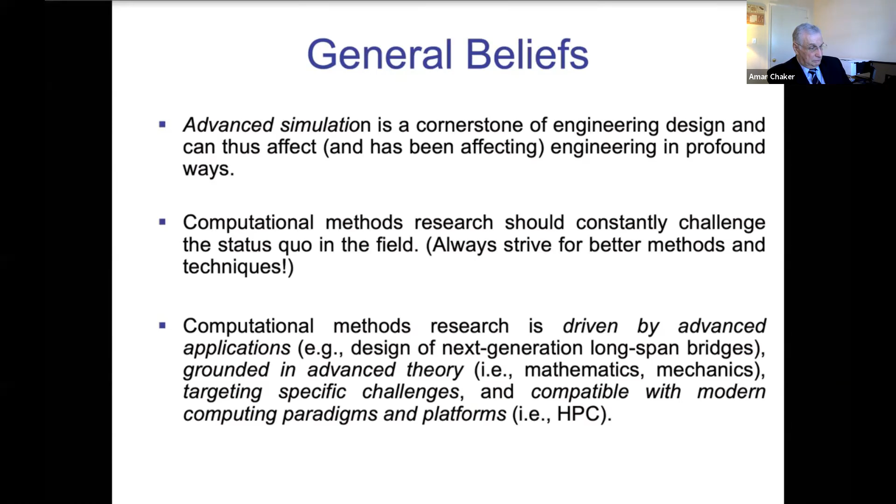Now, maybe a couple of words about operational resilience. It's not exactly my field, but I'm hoping to bring some of my perspectives on computational methods into the OR world. These are some of the operational resilience relevant beliefs, I feel. Starting from the definition, when we talk about infrastructure or enterprise, it's referred to as resilient if it's able to effectively anticipate, absorb, adapt to, and or rapidly recover from potentially disruptive events.

So how do we achieve that resilience? This may be achieved through, first of all, careful initial design when you anticipate such things. Once you've designed and built your structure, it's important to continuously monitor it and assess for things like damage, and hopefully carry out some damage prognosis, which has a predictive flavor to it. Accurate prediction of future behaviors is very important if you want to continue making your structure resilient. And of course, targeted retrofitting to mitigate unforeseen events.

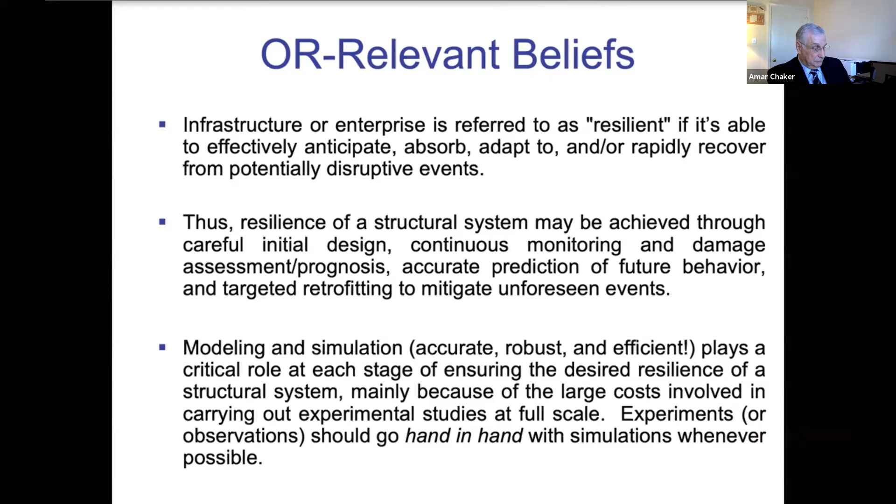And so, as a result, modeling and simulation—and here we're talking about accurate, robust, and efficient methods—plays a critical role in each of the stages outlined before, ensuring the desired resilience of a structural system. This is mainly because of the large costs involved in carrying out experiments at full scale. However, it is my view, and it's been my experience over the years, that experiments or observations should truly go hand in hand with simulations wherever possible.

So I mentioned applications and research driven by applications. Here are some of the interesting things that we're looking at: wind energy, more recently in ocean and marine environments. We also started developing air blast methods for demolition or retrofit.

Biomechanics, especially the realm of biomedical devices, remains really important. We also had some work in manned or unmanned aircraft, and hopefully going into undersea vehicles soon. A lot of these phenomena require a careful job using methods for fluid mechanics and structural mechanics.

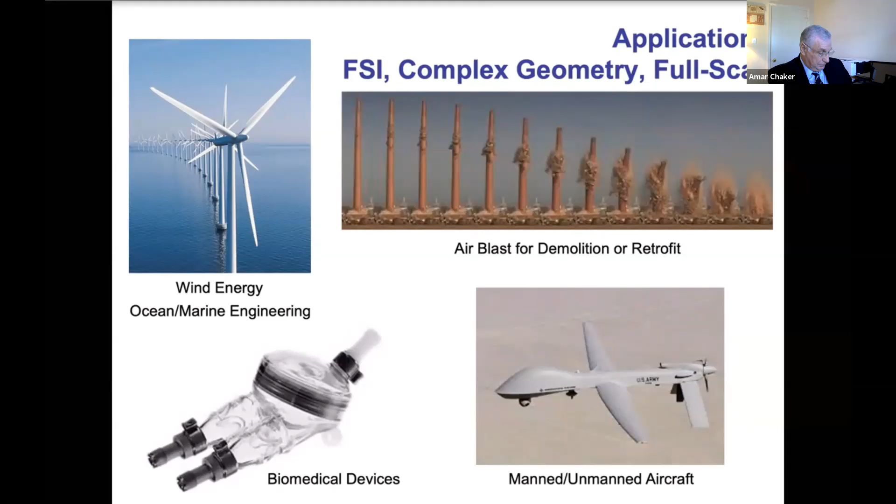Solid mechanics and their coupling. So let me proceed to the how of the presentation, and this is the so-called secret sauce. So how do we do it? Well, there are a couple of things that need to come together.

And the first one is isogeometric analysis. The effort started a few years ago. The first paper appeared in 2005.

So the biggest driver was Tom Hughes, University of Texas at Austin, and I was his first PhD student that defended on this topic. And the motivation for IGA came from the following chart that was provided by Sandia National Labs.

If one thinks about an analysis pipeline: you start by designing a solid model, you create it, you need to carry out geometry decomposition, then you carry out the meshing, you manipulate the mesh to make sure that things are analysis suitable.

You assign model parameters, assemble the model, and then you run the simulations. You post-process results and you archive the artifacts. And what you find is model building and analysis present a significant bottleneck.

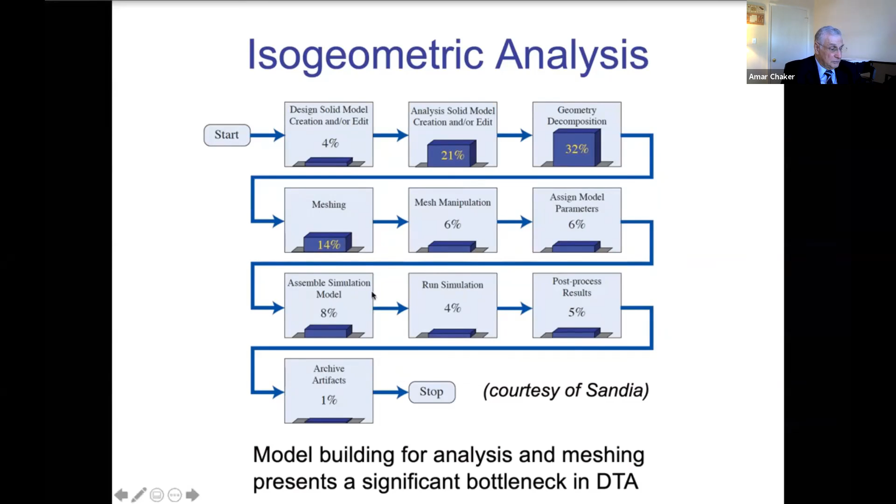It amounts to 70-75% of your effort. And so we looked at the possible solutions, how to circumvent this. And this is how isogeometric analysis was born.

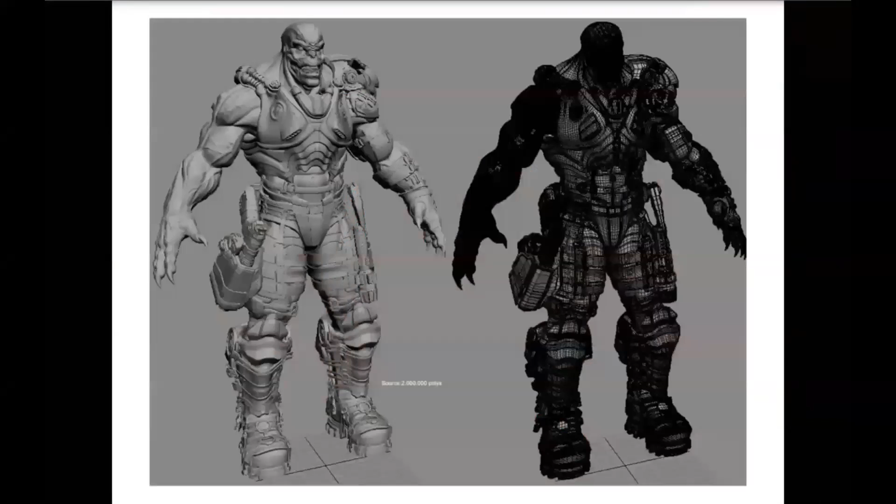B-spline type technology. This is a cartoon character, and on the right you actually see very clearly the underlying surface spline mesh that it takes to model a character like that. This is a snapshot from a CAD software that makes use of what's called NURBS,

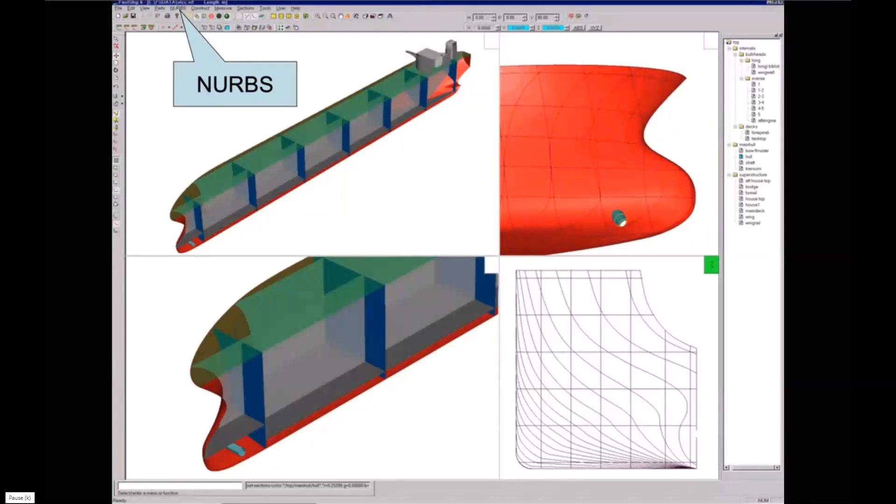where over the years we built an analysis framework which is very similar to a finite element method in many ways. We make use of variational or weak formulations, and just the underlying unknowns, like displacements, temperatures, happen to be discretized by splines.

And so the technologies that we use come from computer-aided design, computer graphics, and visualization. And the idea is that you have the same, in quotes, exact from the standpoint of CAD functional description that's used for the geometry definition as well as the simulation.

And IGA certainly includes standard finite elements as a special case, but offers some other possibilities, such as precise and efficient geometric modeling, simplified mesh refinement once you've built that initial geometric model, superior approximation properties. These spline functions, even the rational counterparts of splines, are very good for numerical analysis. You're able to approximate things very well.

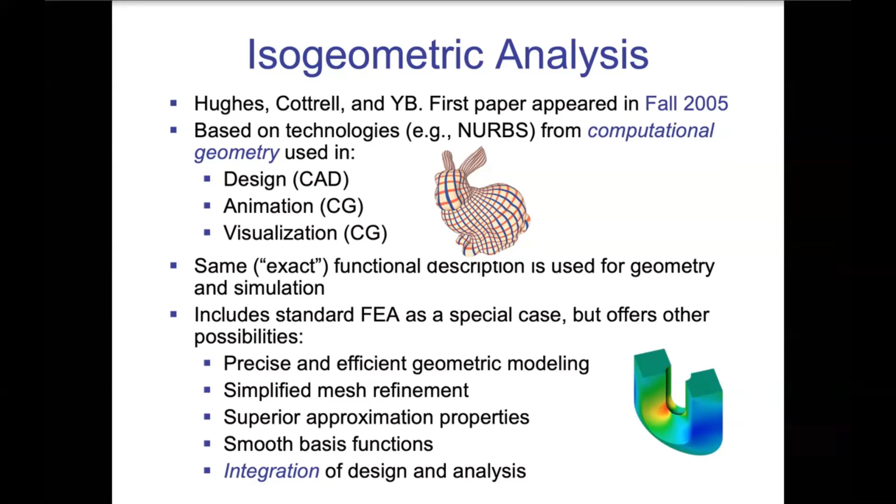All right, so now the mechanics part. This is an engineering mechanics event, and there's no way that I can deliver a lecture in engineering mechanics without talking about weak or variational formulations.

So let me take you through our thinking about fluid structure interaction. And probably the details of some of these formulas are not so important, just the content and the philosophy that is.

We'll look at the problem from the standpoint of an augmented Lagrangian type approach, where you identify, by U1 and P, it's done in the context of incompressible flows, designating the unknowns coming from the fluid mechanics side, velocities, pressures. U2 are the unknowns coming from the solid, typical displacements or velocities.

The way I couple the two subsystems, at least at the level of this augmented Lagrangian, is through a Lagrange multiplier type approach. Lambda is the Lagrange multiplier. The way I define the augmented Lagrangian is I take the contribution from the fluid, I add contributions from the solid or the structure.

At this point they exist independently of each other, and then the way I couple them is through the Lagrange multiplier that enforces the kinematics of the fluid and the structure at the fluid structure interface. Note the subscript T here - that interface can be moving in time.

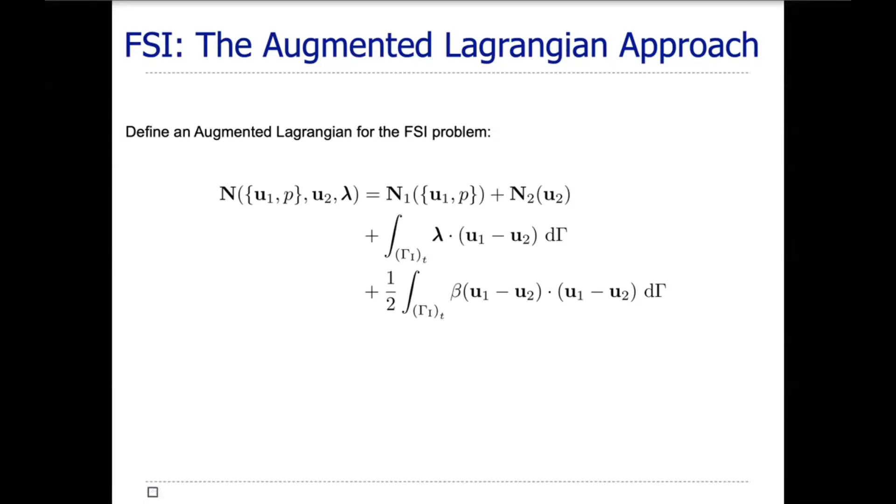Once I have the Lagrangian, I can start turning the crank. I compute the so-called stationary points of that Lagrangian by taking the variation of the expression with respect to fluid mechanics, structural mechanics, and Lagrange multiplier unknowns. That gives me three variational formulations that are coupled with each other.

The top line here is fluid mechanics. You can see that the B's are the semi-linear form, kind of a linear functional, which are the loads. This term here is the effect of the Lagrange multiplier, and this term here is the effect of this additional penalty that I'm bringing in.

The solid mechanics and structural mechanics has the same structure - you have some weak form or variational formulation governing the structure. Here's the effect of the Lagrangian multiplier, and here's the effect of the penalty. And the last equation just says in some weak fashion that the kinematics between the fluid and the structure hold.

This is an important point of departure for a variety of approaches - I haven't said anything about finite elements or discretizations yet. The only constraint at this point is that I will treat both the fluid mechanics and structural mechanics in the weak form, which pushes me in the direction of using finite element methods, isogeometric methods, or mesh-free methods.

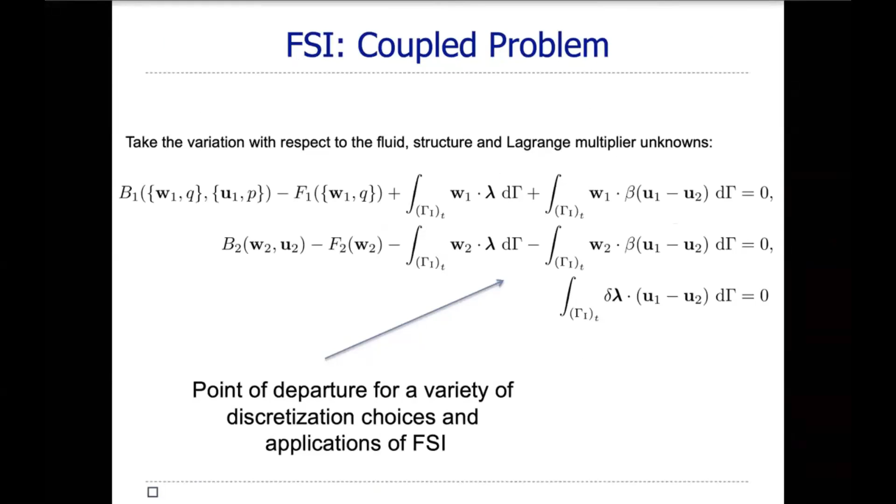Theoretically it's very good, but I really do not want to carry Lagrange multipliers with me. It makes things complicated, and it makes things fairly expensive from the computational point of view.

The approach I take here is that first, as we all know, Lagrange multipliers, when they penalize kinematics, they take the interpretation of force, or in this continuum setting, of the traction.

But now I have two subsystems that I'm coupling, fluid and solid. So the Lagrange multiplier has the interpretation as a fluid traction or a solid traction. And because of the presence of these penalty terms, the Lagrange multiplier also has this kind of contribution from the mismatch between the fluid and the structural kinematics.

But if I subtract the two equations, I get this condition here. So independent of the presence of the Lagrange multiplier terms, the fluid and solid traction in this framework are always in balance. This is what you like to do.

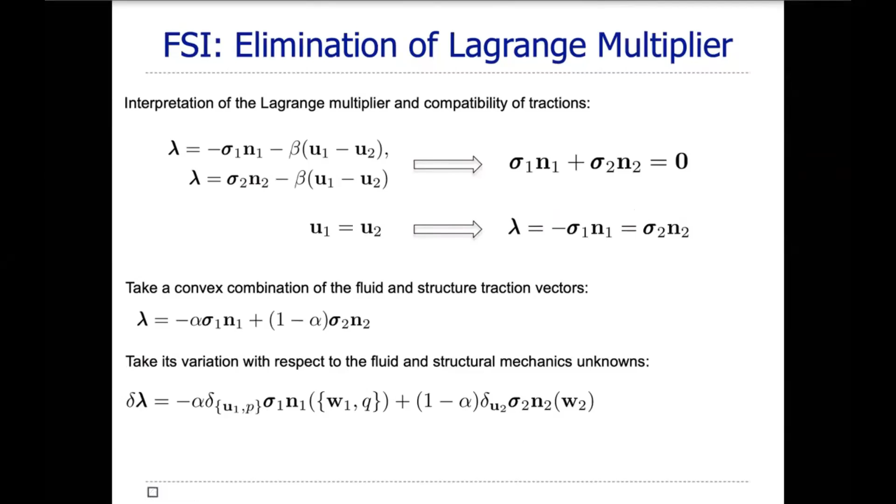Taking this as an expression for the Lagrange multipliers, I can take a convex combination. I can take a variation of the Lagrange multiplier also with respect to the fluid mechanics and structural mechanics degrees of freedom, and I can take this formulation and condense it to something like this.

So I basically analytically remove the Lagrange multipliers from the formulation, and I arrive at a fully coupled fluid-solid system. And here, because the fluid mechanics and solid mechanics fields exist independent of each other, I can discretize them independent of each other.

And then the coupling will take place over the interface that moves in time, using these additional terms that arise from the analytical elimination of the Lagrange multipliers. This leads to an efficient fluid structure interaction framework that could lead to a lot of practical applications.

One thing I'd like to note: these methods were developed for non-matching but conforming interfaces. You can think of two different meshes for the fluid and the structure that don't match at the interface, because the structure could be more complicated and in the fluid case you may want to simplify things. But at least they're somewhat conforming to each other, so as the structure moves through space, you're able to move the fluid mechanics mesh that follows it.

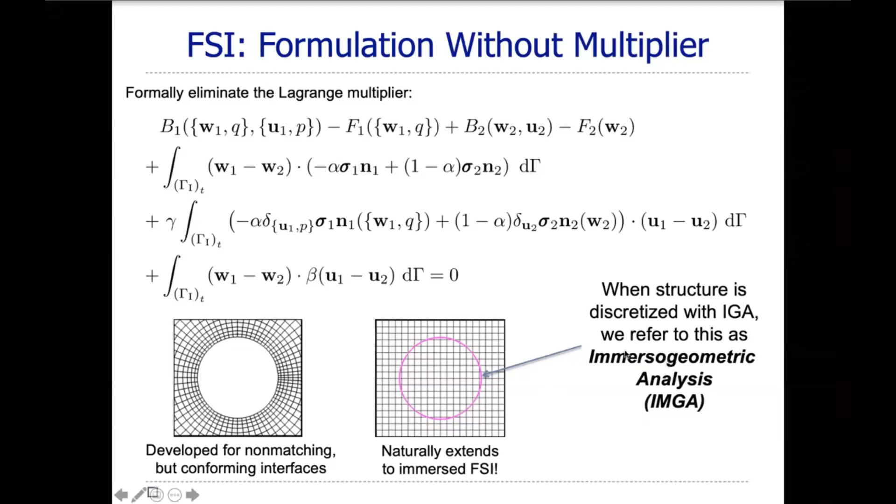But there's been a lot of excitement in the community for the so-called immersed type methods. The formulation can actually be applied directly over immersed boundaries. When the structure is discretized using isogeometric analysis, we refer to this combination as immersogeometric analysis, or IMGA.

So I can set some coefficients, and I find that if I look separately at the fluid mechanics and the structural mechanics problem, I have a weak formulation of fluid mechanics that's driven by the structural kinematics, given here by U2. It amounts to what's called a weak enforcement of kinematic boundary conditions for fluids, which is really important in this setting because I can control the extent to which I satisfy these kinematic conditions.

So if you work on coarser meshes, you can relax the satisfaction of the no-slip component, allowing a relative slip between the fluid and the solid, and thus you don't need to employ very fine boundary layer meshes.

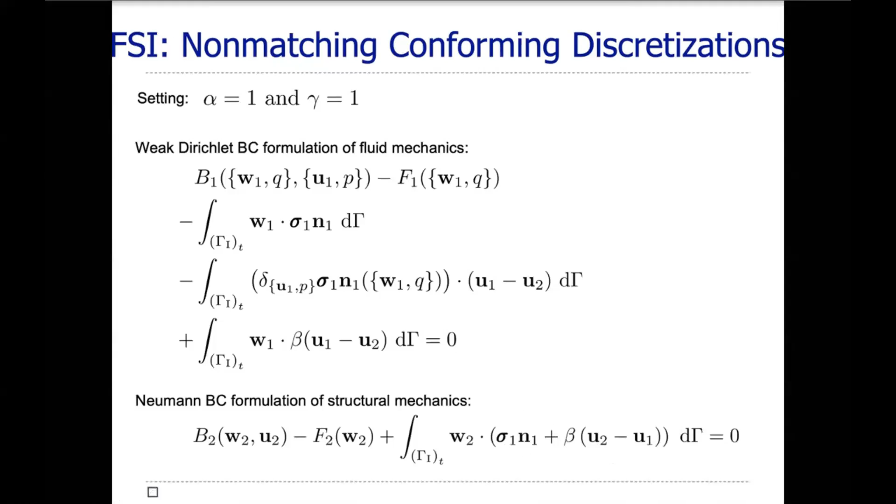When it comes to the structural mechanics or solid mechanics formulation, you see that it's driven by the traction coming from the fluid. It becomes something very classical, but that traction is modified by a penalty term that takes into account the difference between the fluid and structural kinematics.

So, some special cases: if the meshes match, if I match the fluid and structural discretizations on two sides, all of these interface terms drop out, and I recover classical monolithic FSI.

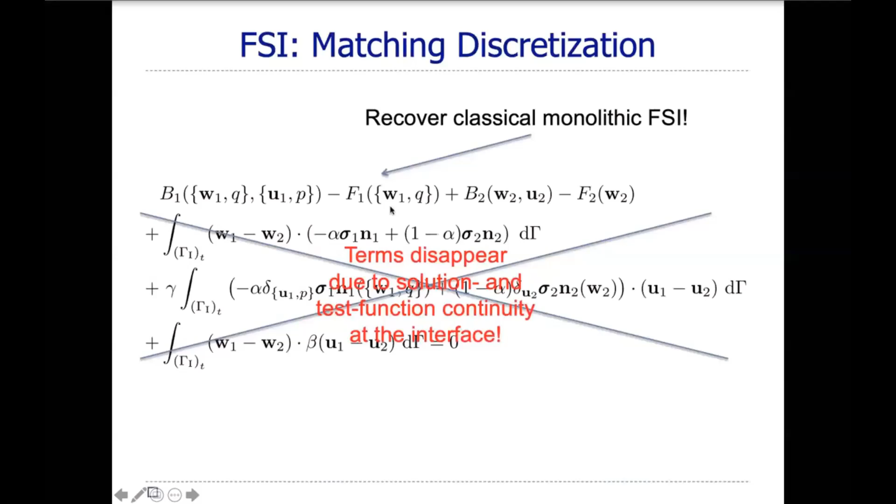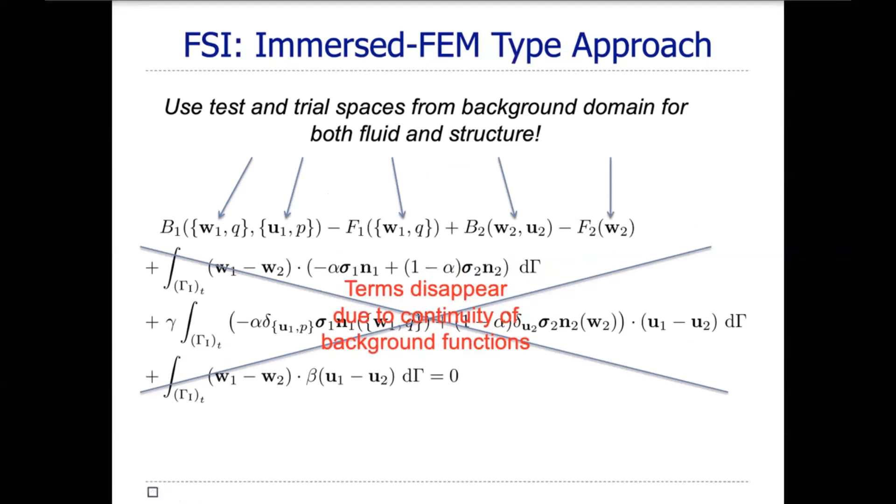Another interesting thing is if I decide to approximate the fluid and structural solutions using the background mesh quantities, again the interface terms drop out, and you get an immersed finite element type approach. We'll show examples of that later in the presentation.

Next, if you decide to get rid of the fluid completely and just leave the solid, and approximate it using the background discretization, you arrive at what's called a material point-like technique. So there are a lot of important special cases.

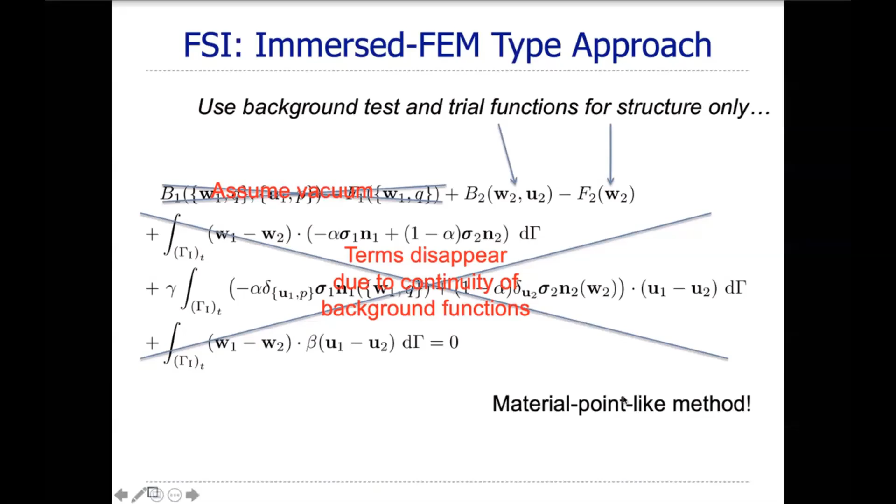Again, this was a fairly cursory overview, but I just wanted everyone to get a flavor of how we think about FSI problems and what we do. Of course, there are a lot more details that go into decisions as to how to stabilize the fluids, the choices of nonlinearities in the solid, how you want to approximate damage, how you want to approximate fracture, and so forth. But this overall framework allows you to plug in and remove different approaches, you kind of use your favorite approaches for things.

So next is the outcome, the what. Hopefully the why and the how is going to lead to a what that's significant. Here I want to cover a couple of cases that we worked on over the years, and let me start with the work on the fluid structure interaction analysis of full-scale wind turbines. Here I'm listing collaborators, a lot of whom are my former students. They're faculty at other universities, as well as Sutanu Sarkar, who's a real expert in stratified flows at UC San Diego.

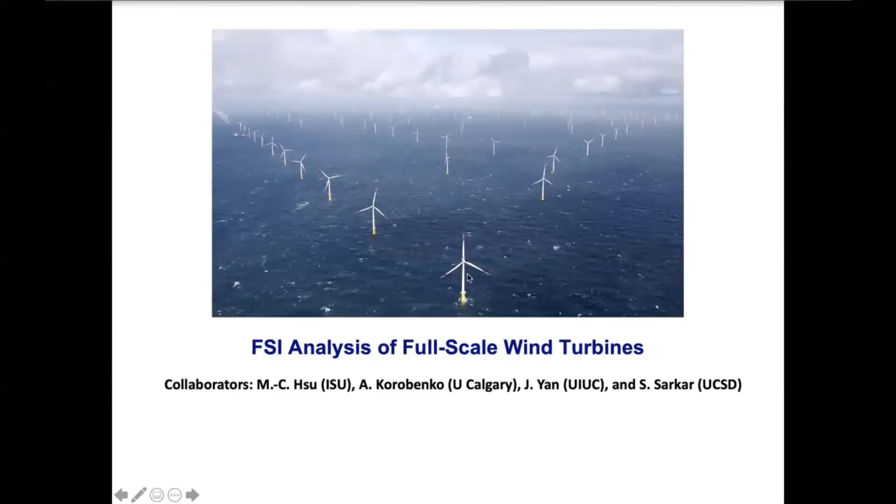And the problem that we're after is to be able to simulate scenarios like this. Just like in this figure, it's been noticed that depending on the direction of the wind and how the turbines are placed, the turbines in the second row or third row start producing less and less electricity than the turbines in the first row. Certainly modeling can help understand that question. So we abstracted our problem as follows: we're placing two turbines back to back, separated by about 1 kilometer.

All the dimensions are in meters, so there's about 1,000 meters, which is in between. We're trying to solve things at full scale. The idea is to carry out a fluid structure interaction calculation of this setup, but we have to do it in a way that's manageable and practical.

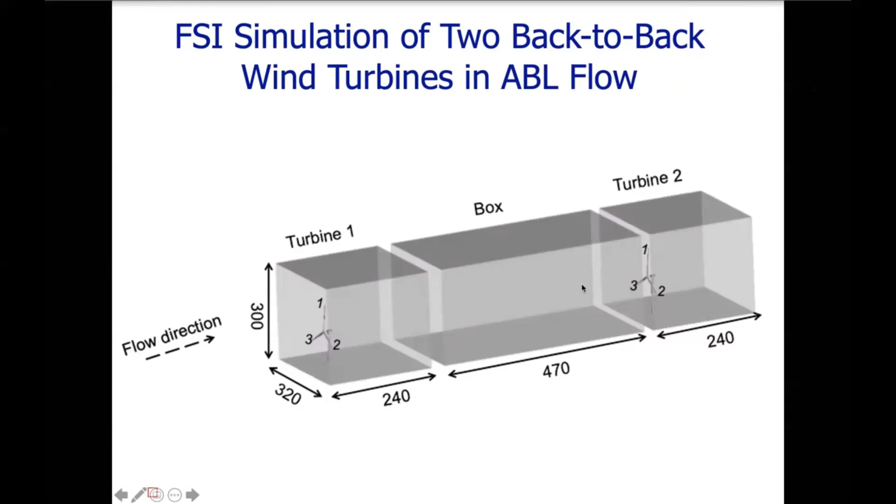So what are some of the key ingredients that go into this calculation? First, let's talk about the structure, and this is where isogeometric analysis comes in. While in these simulations the tower is assumed to be rigid and stationary, the rotor spins, the blades spin, and they're able to generate deflections as well, so we treat it as such. The blades are actually complicated composite structures.

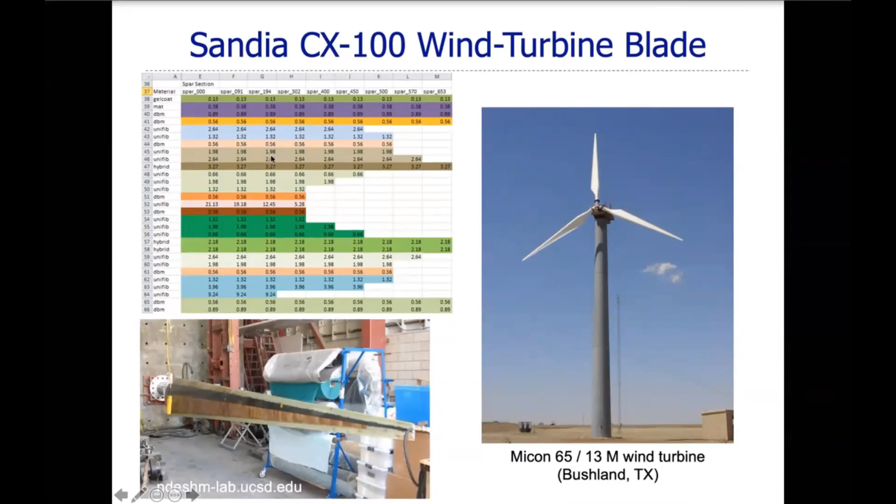This is an example of a 10-meter Sandia CX100 blade, a picture taken from a structural lab at UC San Diego. We got the blueprints for that, with a complex distribution of composite materials in different parts of the blade. Using ideas from isogeometric analysis, we built a geometrically exact model of that blade, distributing the composite parameters through the thickness, and we're comparing some of the natural frequencies coming out of our model compared to frequencies obtained through full-scale laboratory testing of that blade, and the correspondence is quite good, both for the clamp case and the free case.

When it comes to approximation of some of the lower modes, like the first flapwise mode, second flapwise mode, first edgewise mode, and so forth—that example was done a couple of years ago, around 2013 or so, and presents really a first validation of isogeometric methods in the full-scale structural setting.

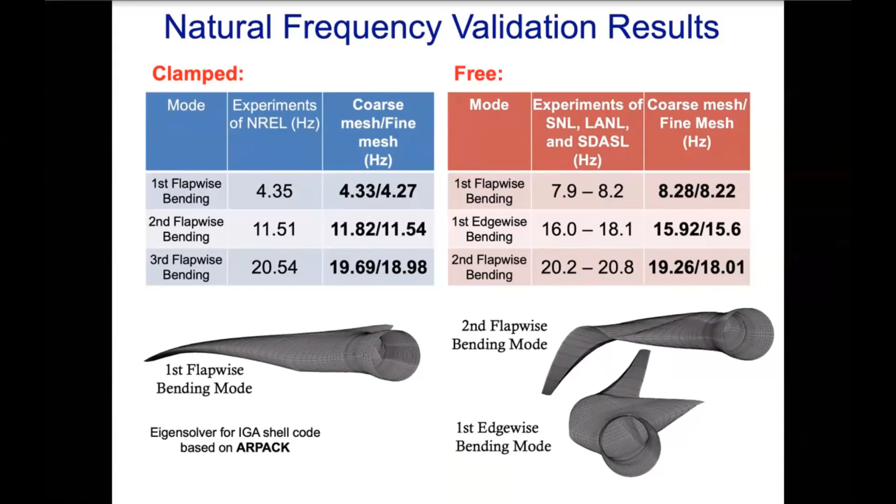So next, we're going to put our flexible blades into an FSI framework. Here, another challenge that needs to be addressed is that the tower is stationary and the rotor is spinning. That's done again using a formulation with two domains: one domain moves, and the motion of the domain is dictated by the motion of the rotor.

There's a way to take a weak form of the fluid mechanics equations and put them on a moving domain using the arbitrary Lagrangian-Eulerian formulation. The domain around it contains a tower—there's no need for it to move. If it did move, then you'd have a problem with the tower, so that domain is stationary. But because of that rotational motion, the interface between the two domains remains cylindrical.

So the remaining challenge is to be able to couple the two fluid mechanics solutions on the interface that is stationary and the interface that is moving. Again, it's done through some of those augmented Lagrangian ideas that allow you to couple discontinuous solutions, using this augmented Lagrangian approach with an analytical elimination of Lagrange multipliers.

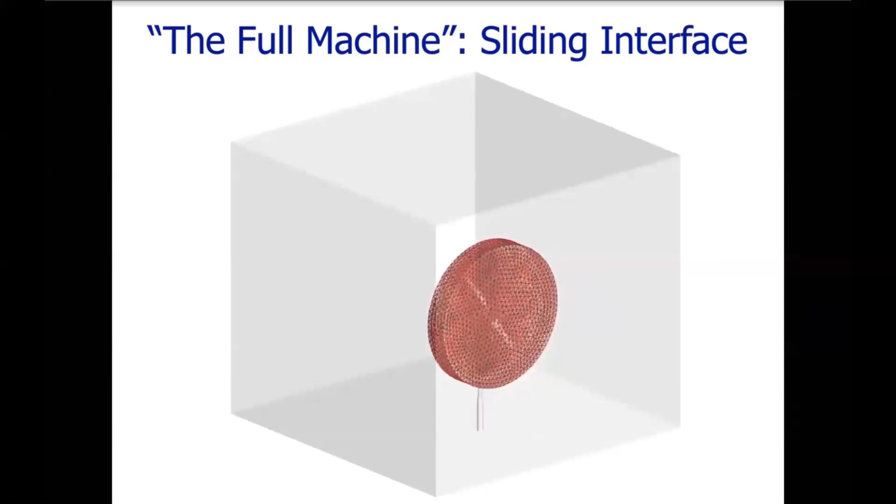So we did a test on a NREL Phase 6 wind turbine rotor. This is sort of a test turbine—each blade is about 5 meters long. So it is full scale, but the scale is not big enough to generate much power; it's used for a lot of testing.

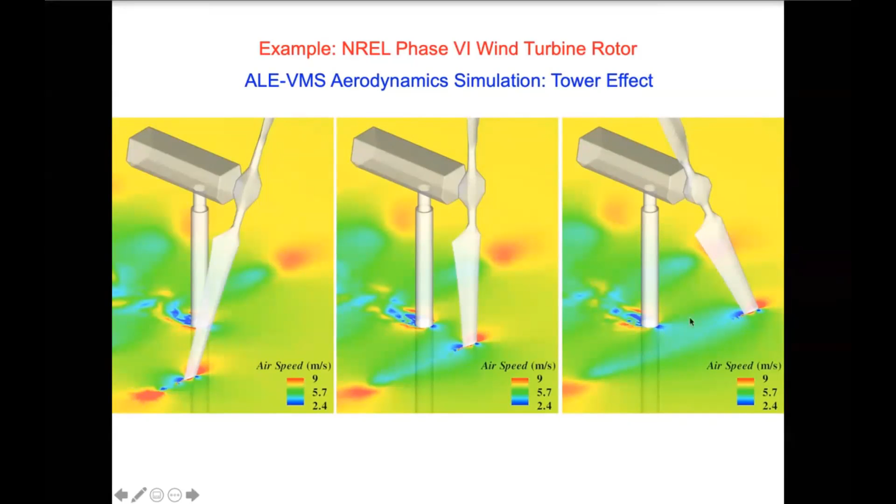These are some of the snapshots of the calculation. You can see with that approach how the blade passes the tower, and then the corresponding changes in the aerodynamics. The sliding interface is somewhere between the blade and the tower, but you cannot really pick it up in the calculation.

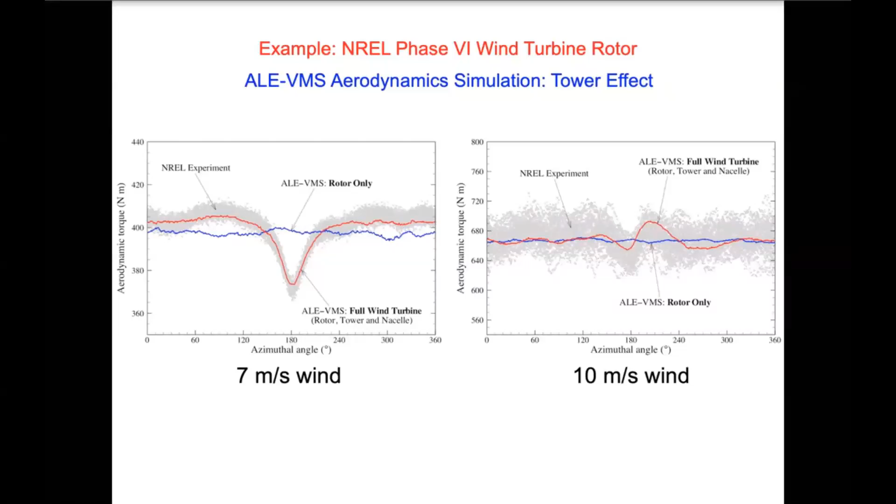So these techniques seem to work quite well. Now, you change the speed to 10 meters a second, you get a much bigger spread in the experimental data, and now the location where the rotor passes the tower is no longer as visible. You can sort of pick it up, but it's not as pronounced as in the 7 meter per second case. So there's quite complicated coupled phenomena taking place that we're able to capture with these methods.

So next step, when you go to the full scale, these are rotors that are 300-400 feet in diameter, and you have a tower. So every time you're looking at the wind, you cannot assume uniform airflow anymore.

In fact, these wind turbines operate in thermally stratified boundary layers. So we teamed up with Sutanu Sarkar and his students at UC San Diego to understand more about stratified flows, and we were able to take that formulation and put it on a moving domain, because we need it on a moving domain to carry out the calculation. So what you're seeing here is a spinning cylinder with a stratified boundary layer flow, where you see a very fast flow in the middle, the so-called inversion layer, the boundary layer here, and some modicum of turbulence around.

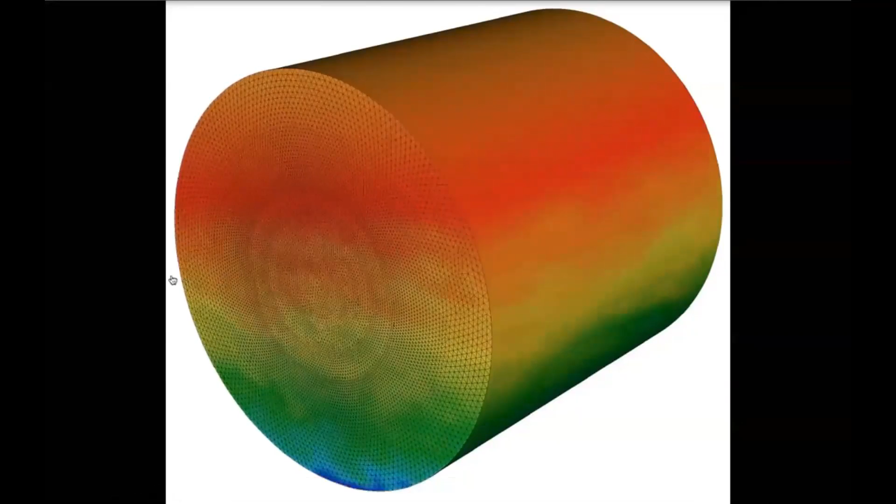This is a comparison of our moving domain model with that of Sutanu Sarkar, and the average boundary layer for velocity and temperature is represented quite well in our framework.

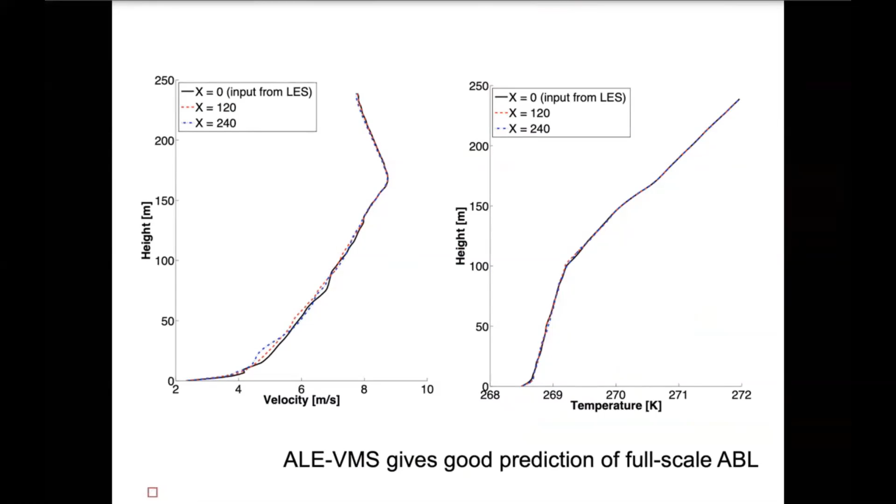So now we have the ability to couple the fluid and the structure. We're able to carry out fluid mechanics on domains that spin and domains that are stationary, and by coupling the two, we're able to bring atmospheric boundary layers into our fluids calculation. Now we're ready for a problem like this.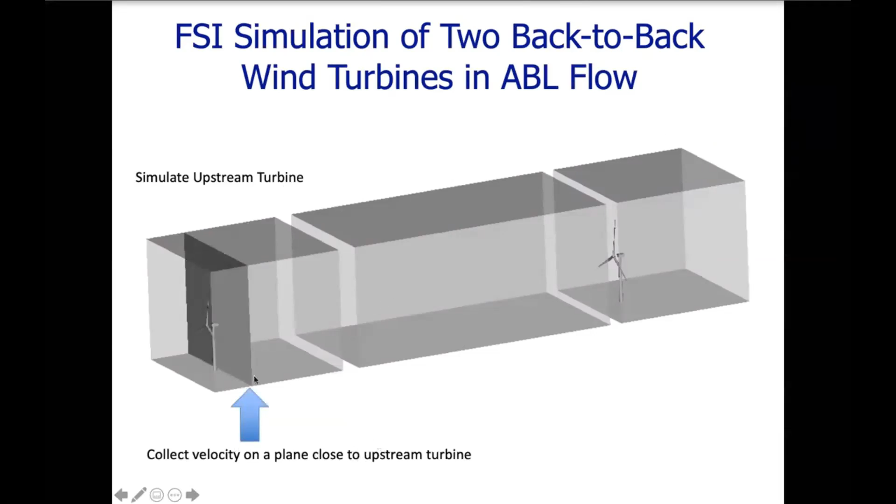The way we're going to handle it is as follows. We'll break up our domain into 3 subdomains. We first simulate the upstream turbine, collect the velocity on the plane close to the turbine itself, impose it as an inflow condition on the intermediate domain. So here we just need to transfer all this flow into the turbine in the back, collect the velocity at the outflow plane, and impose it as inflow boundary conditions.

Nothing too complicated here, we just got to watch 2 things. Upstream turbine inlet and all lateral boundaries: the velocity boundary conditions come from a standalone ABL formulation, computed by Sutanu Sarkar's finite volume code. These conditions are imposed everywhere on the sides of the computational domain.

Another important thing is because you do have this thermal stratification, you no longer have a uniform pressure on the outlet. So the pressure does take on a certain profile, which you can compute from this first simulation. Then you need to take that and apply it as an outlet boundary condition in every one of the domains, to make sure you guide the flow from one domain to the other without any dispersion.

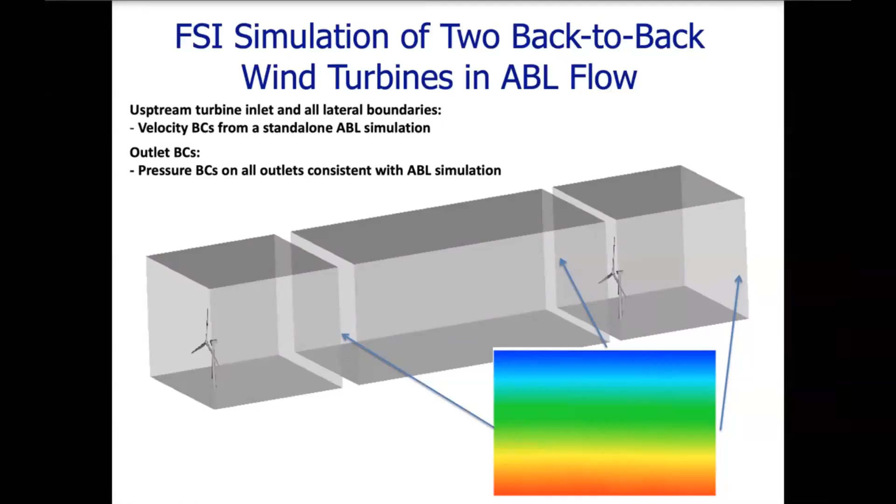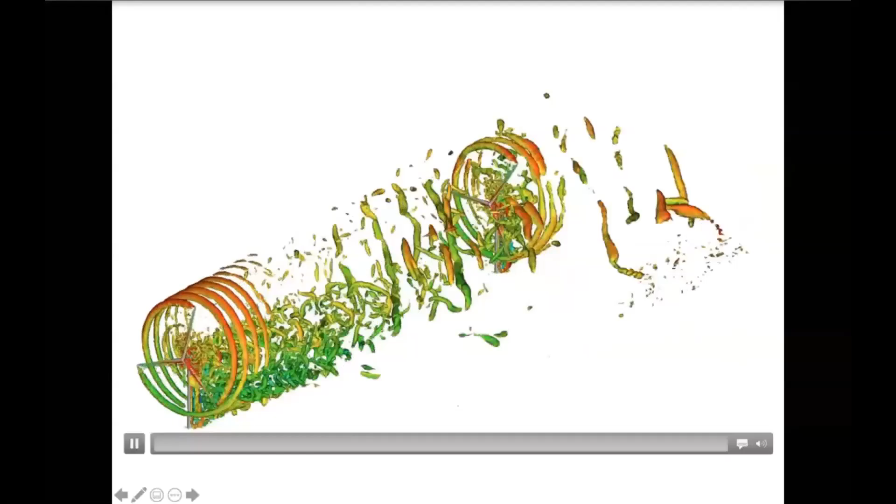Once all these things come together, you can put together a calculation that looks like this. You can see the upstream turbine is generating this tip vortex. There's quite a bit of turbulence that gets shed off the tower, because this turbine operates in an atmospheric boundary layer with turbulence around. These vortex rings don't persist, they break up pretty quickly, but then it looks like they recombine further downstream. A very interesting observation we made, and we've seen it in some of the other calculations by other researchers. And then all this mess goes and hits the turbine in the back. We're able to capture that phenomena.

Quantitatively speaking, we can track the tip displacement of the upstream turbine, and you can clearly see the effect of stratification. You see a lot of displacement in the inversion layer, when the blade is in the vertical direction facing upwards. As it goes around the circle and goes down, it goes into the regime of slower flow, and the deflection decreases significantly, as you can see.

So you have this sort of cyclic behavior and the corresponding loads, and the corresponding structural response and stresses that you need to take into account when designing wind turbine blades for this type of operation. It's these type of advanced calculations that are really shedding light on this more nuanced behavior.

This is aerodynamic torque, again comparison between the rigid and flexible blades, and you can see that with the flexible blades, you can pick up additional deformation modes. There's a slower mode here, and also a high frequency torsional mode that we see in a lot of these calculations.

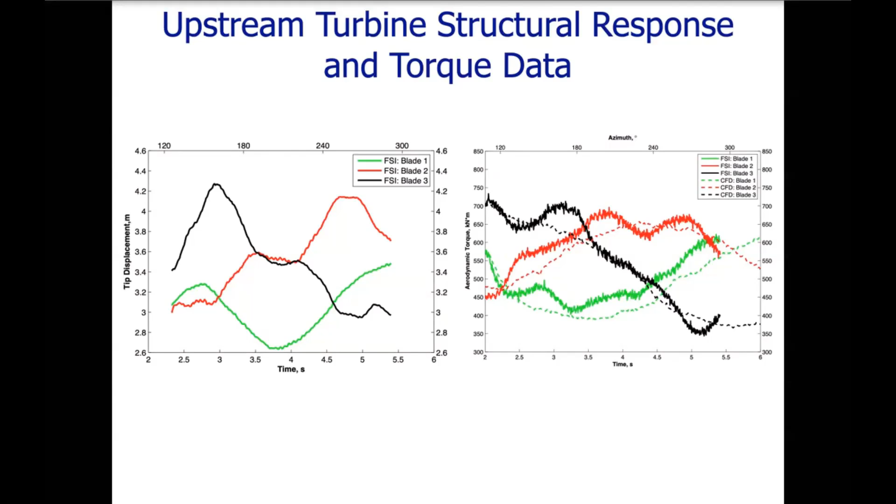Again, that's not possible in a pure CFD simulation of these systems. This is the air velocity profile as we're moving: very clean before it hits the first turbine, then it gets really disturbed. It takes a while to recover, about half a kilometer.

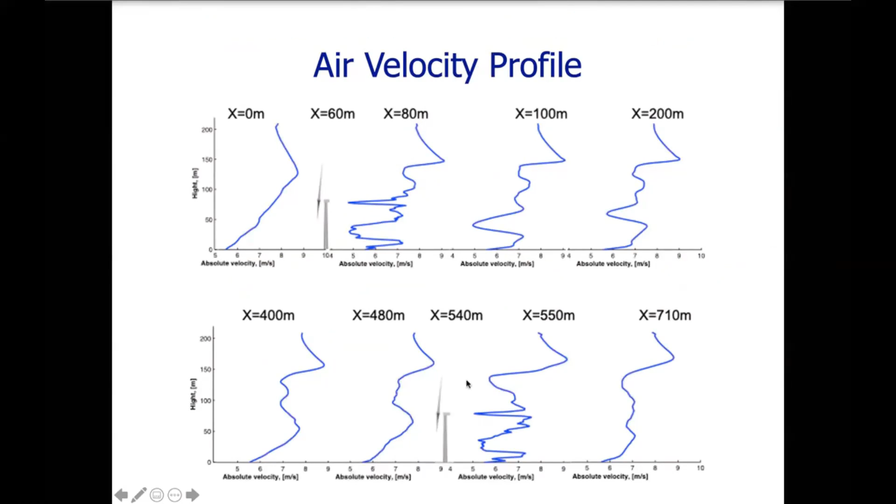You get a clean profile overall, but you clearly see the velocity deficit that comes from the upstream turbine. Then that profile with the velocity deficit hits the turbine in the back, and again the boundary layer gets disturbed, but the result of this velocity deficit is clearly seen.

If you look at the time history of the aerodynamic torque for the upstream turbine and the downstream turbine, you can see a drop of about 10 to 15%. If you take the aerodynamic torque and multiply by the rotational speed, that's the power a turbine captures from the surrounding air. The downstream turbine captures 10 to 15% less power and will likely generate a smaller amount of electricity based on that drop.

So we're actually capturing that effect in these calculations, and these are the numbers reported for some wind parks. So we're not completely off.

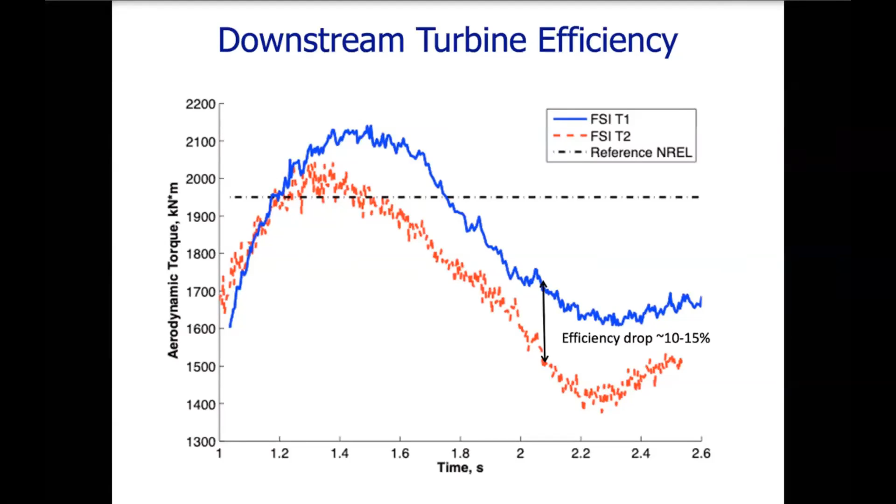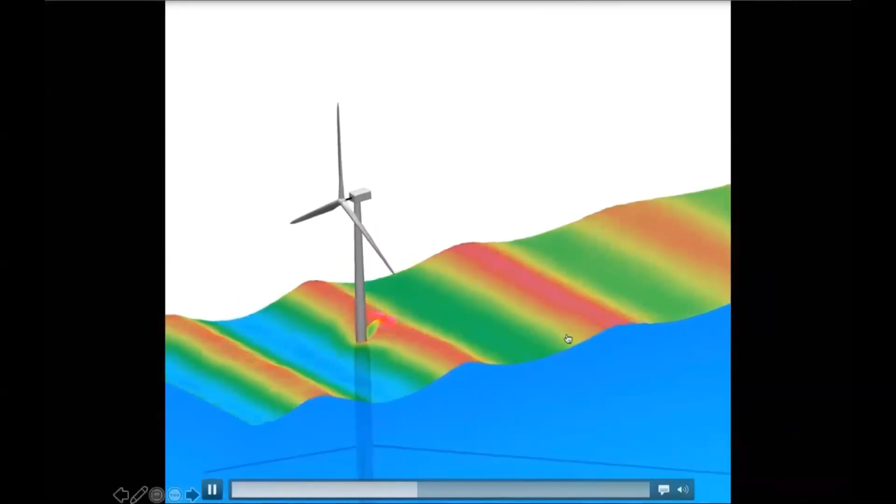Of course, the next challenging step: how do you go offshore? This is a calculation we did of a floating wind turbine. The entire structure is built using isogeometric shells, moored to the seafloor using isogeometric cables, and immersed in an air-water two-phase, two-fluid framework where we use a level set technique to distinguish between the two fluids. But again, this just shows where this research will likely go.

All right, let me talk about the second case. It deals with FSI analysis of long-span bridges, where some of our methods are trying to make a difference in this type of application. Our collaborators are from NTNU in Norway. They're carrying out a lot of experimental analyses for this type of application, and this has been a fruitful collaboration over the past couple of years.

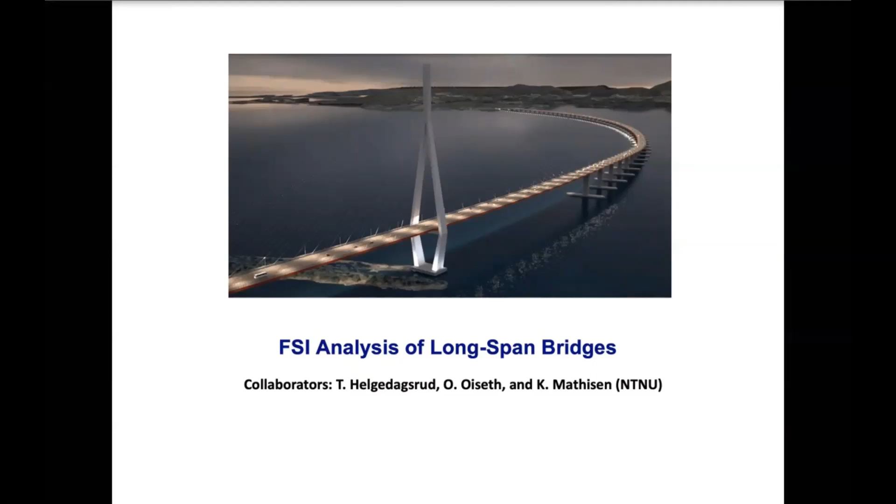The challenges are that these are very long bridges, not typical designs. Especially in Norway, you have very specific conditions in these fjords, oftentimes very strong winds. Because of the different environmental conditions and the different designs for the bridge decks themselves, you have to develop a good understanding of how these long span designs react to wind loading, what are the conditions for flutter, for buffeting, and so forth. So these questions are driving a lot of that research.

There are many ways to study flutter; oftentimes it's done by forced vibrations, which allows you to determine the so-called aerodynamic derivatives. You carry out prescribed motions of the bridge deck, pitching and heaving motions, and extract the lift and moment coefficients. Then you write down a fairly simple dynamical system, where the coefficients depend on the aerodynamic derivatives.

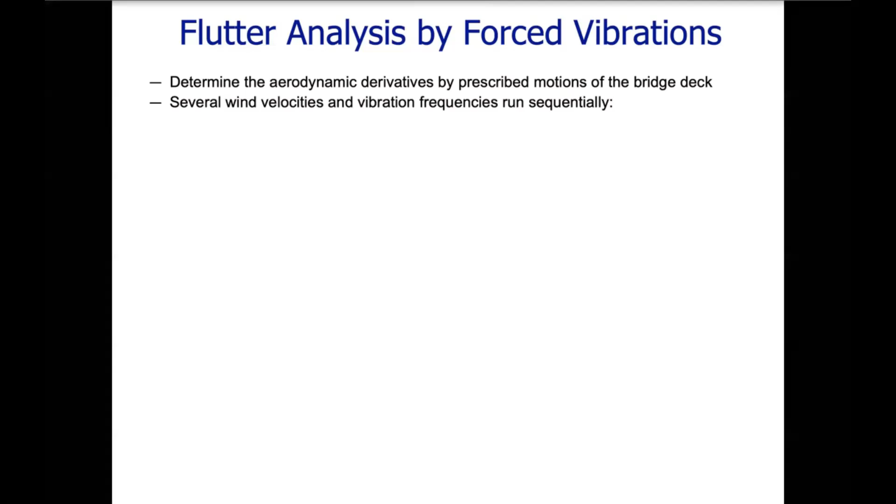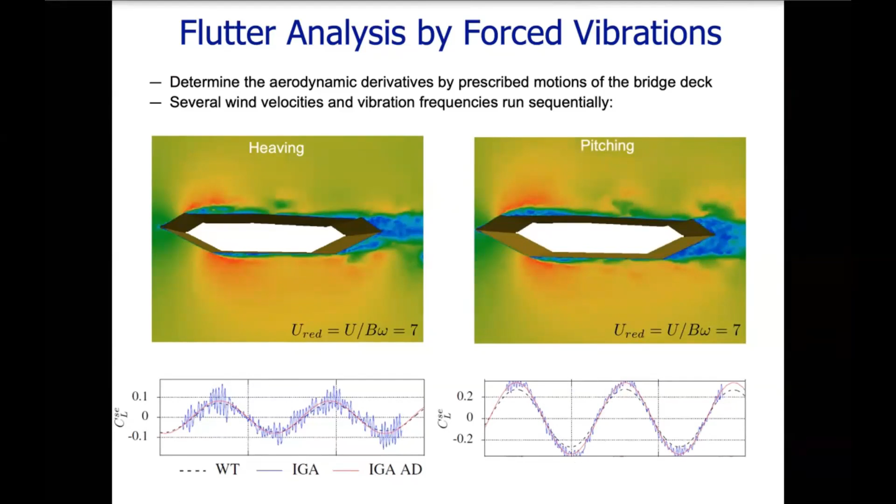Now you can see that things get a little bit more complicated from the fluid mechanics point of view. Again, this is the lift coefficient, comparison of the IGA simulation and the test data. As you can expect, the frequency lines up quite nicely, but there's some discrepancies in the amplitude of the pitching. We'll come back to that point later to explain why, but overall the agreement is not so bad.

So then you go ahead - this is the damping and stiffness matrices that come out of the simple dynamical system approximation, populated by the H's and the A's of the aerodynamic derivatives, as a function of the reduced velocities extracted for these forced vibration type calculations.

The red are the experimental results and the blue are the computational points. You see that the overall agreement is not so bad. There's some suspicious behavior in the A4 and H4 related to pitching motions, where you can see some of the issues cropping up. But overall it's pretty good, and certainly a lot less expensive to carry out the calculations than experiments, especially if you're planning to test multiple deck designs.

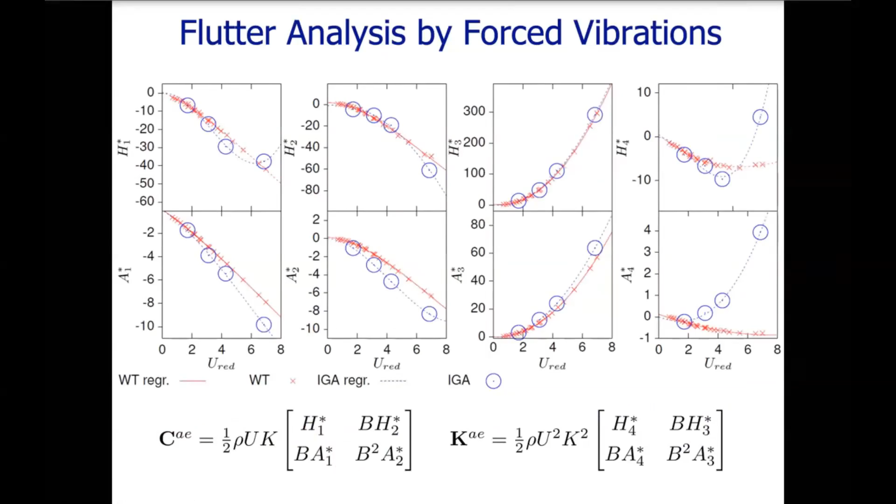Now, you don't need to limit yourself to forced vibrations. You can do free vibration, where you simultaneously solve for the fluid mechanics and the motion of the bridge deck, which become your problem unknowns.

So these are the calculations of the bridge deck in still wind, with just maybe a little bit of velocity, comparing the wind tunnel and simulation data. We're capturing the decay very, very well in the heaving amplitude and the pitching amplitude here.

This is the calculation at 50% flutter speed, again comparison of wind tunnel and simulations. We're actually capturing the decay of the heaving amplitude very well, and the pitching amplitude very well, and you can see that the heaving decays much faster than pitching here.

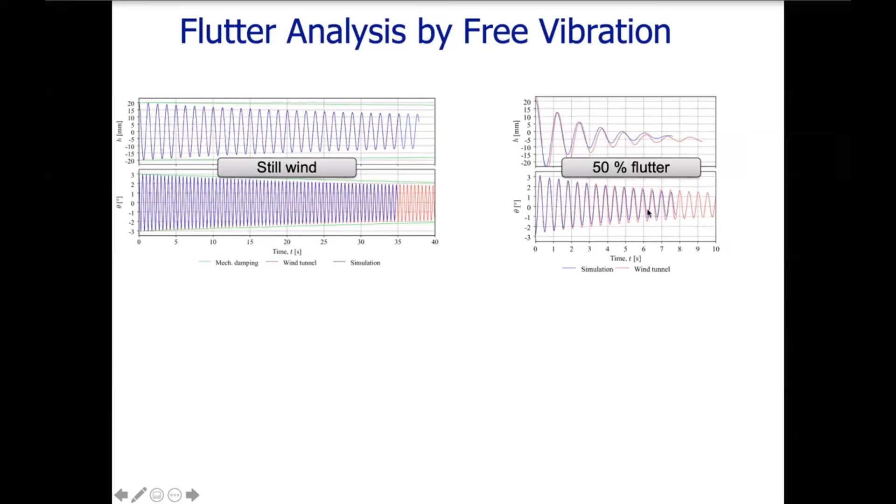This is the experimental setup at NTNU. They put this in a wind tunnel and send the wind this way, and they find the reduced critical velocities and frequencies at which flutter occurs, and our calculations give very close numbers. We're actually able to predict the critical velocity and frequency for this bridge deck just by doing calculations.

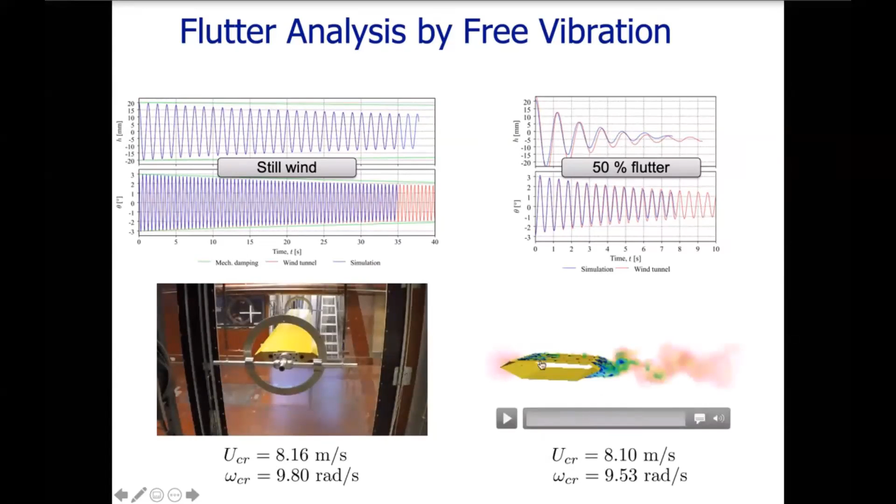Now the next topic: of course, in reality, nothing exists in uniform inflow conditions. Even in the wind tunnel, there's a certain amount of ambient turbulence present, and often you put in screens to control how much turbulence you want in the air, to mimic real conditions. We needed to bring this into the simulation somehow, and there's quite a bit of work doing this, basically doing synthetic turbulence and feeding it at the inlet with prescribed turbulence intensity.

We decided to do something different. We decided to use our multi-domain capabilities to first develop a turbulent flow offline. So we did an offline calculation of a three-dimensional turbulent channel, with wind speeds and dimensions corresponding to that wind tunnel. The parameter we control is the turbulent Reynolds number.

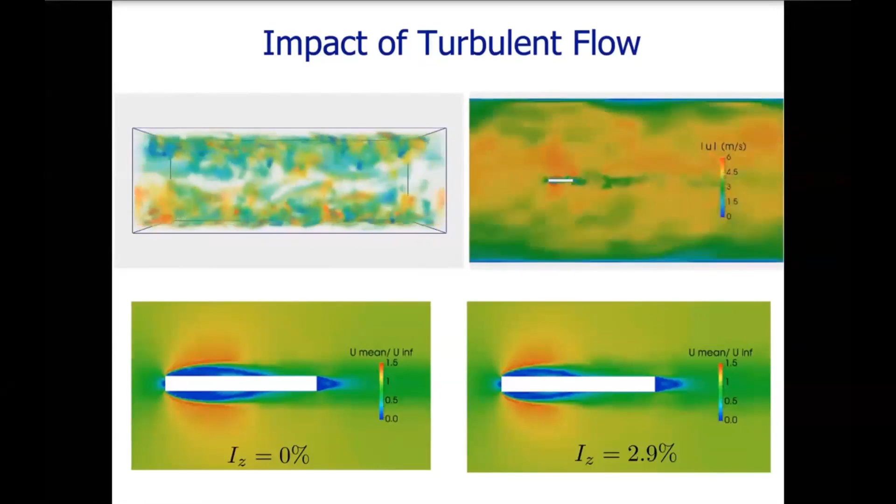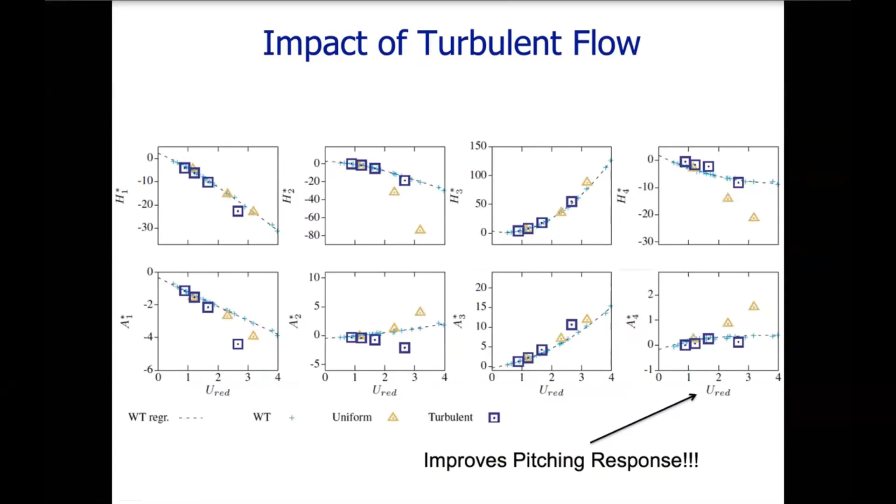So then we went back, right? We fed the turbulence in, and we recomputed the aerodynamic derivatives. And lo and behold, if you look at H4 and A4, by introducing just a little bit of turbulence into the surrounding air, it gives you much more accurate pitching response. So I think this is another important observation and finding of this work.

And then you can go beyond. You can see a situation where you've designed this bridge, and then you have some wave conditions, right? You have a wave that comes in, and this could be like a 100-year wave, which is 2-3 meters in amplitude, comes in at about 10 meters per second. And so as that wave goes under the bridge and you have strong wind, what happens to wind loading in this case? So with the Norwegian colleagues, we set up this scenario.

Again, on a moving grid. So what you can do is take the bottom of your computational domain, assign a wave profile and propagate it, so the surrounding air feels the presence of the wave.

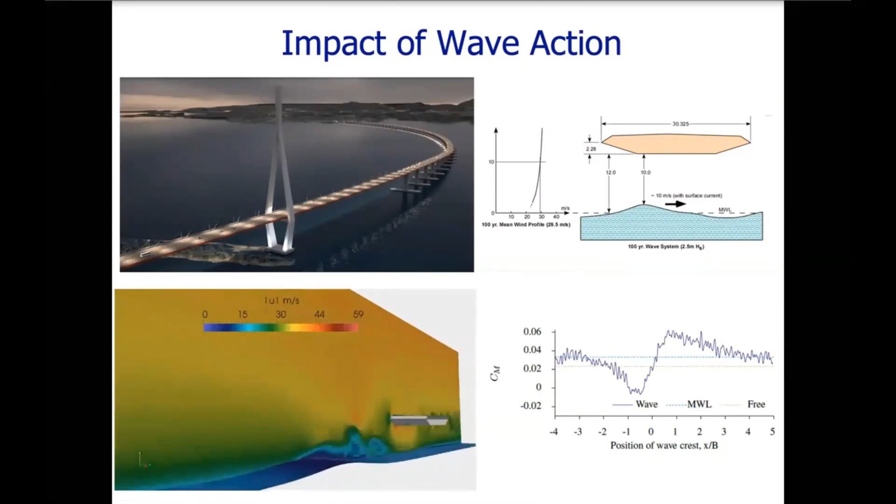And again, these are some of the loads that you may want to take into account when trying to design resilient long span bridges. So this moving domain fluid structure interaction can help you in these type of designs quite a bit.

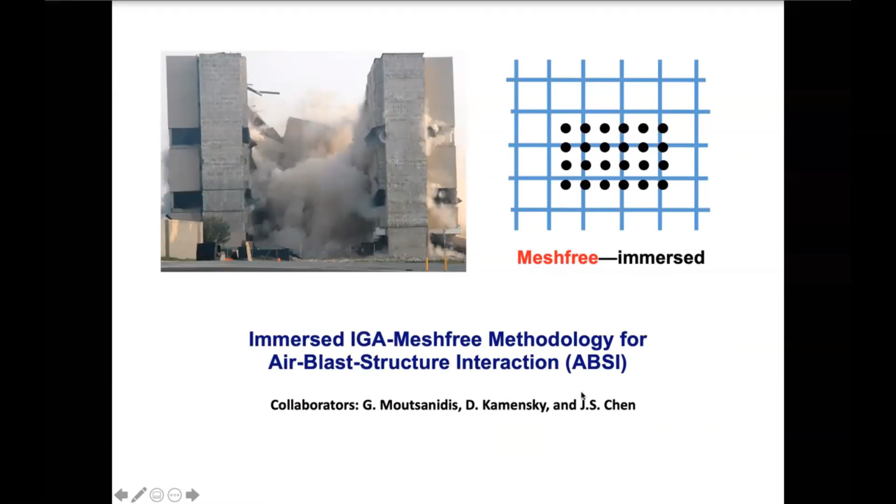Okay, let me close very quickly with the application that we've been developing with my group members and collaborators from UCSD, and I'm at Brown now, on the air blast fluid structure interaction. Here we're coupling isogeometric and mesh-free methods. We've been working on the immersed FSI framework that couples large deformation inelastic solids with compressible viscous flows, both in the weak form.

And I have a priori strong coupling even for explicit time integration. Spline-based isogeometric analysis is used in the background, and it's used to approximate fluid and solid fields.

In the absence of the fluid that I showed you in the beginning of the presentation, the formulation reduces to an MPM or a material point-like method. The good thing is that because of the isogeometric methods and smoothness, you have a continuous strain rate, so as the particle goes from one element to the other, there's no discontinuity in the strain rate or stress, and you get overall stability and accuracy as a result.

For the foreground, we use a mesh-free method like in RKPM, which is very nice for being able to fragment and disintegrate the solid.

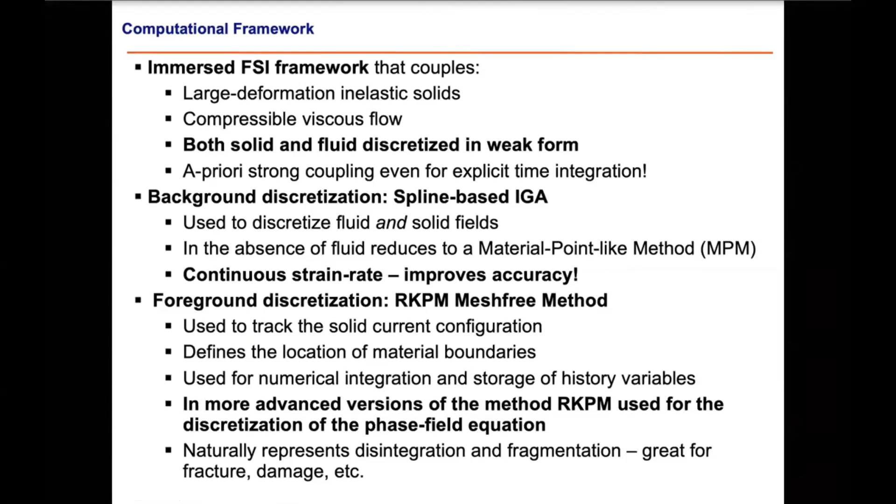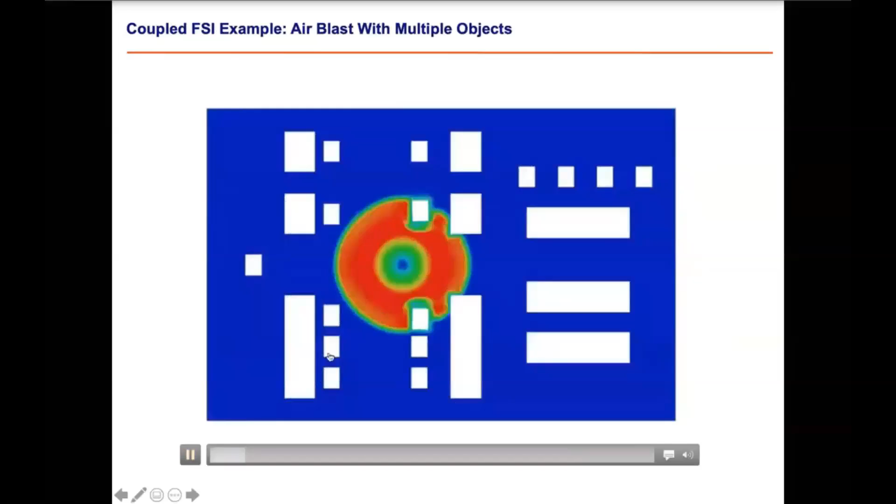And so with this, we can carry out calculations like that, where you set off a blast, this is a two-dimensional calculation, in the room, and you can see the blast wave going and interacting with the objects, and the objects contact each other. So these are some of the advantages of using these immersed methods, that you don't really need to do anything special for contact and so forth.

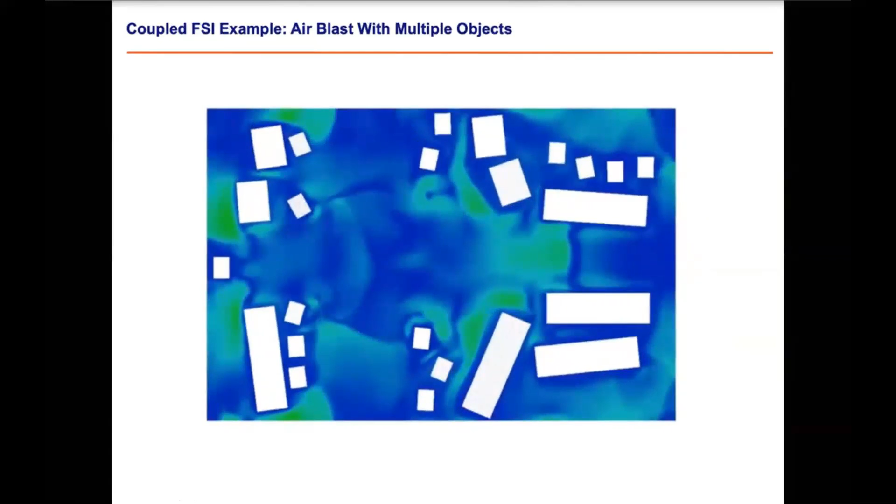Right, and you can see that the gaps are naturally created or removed between the objects, and air can very naturally enter these gaps. This is some of the difficulty if you try to do everything Eulerian or everything Lagrangian, you see the weaknesses. Here we're really combining the best of both worlds.

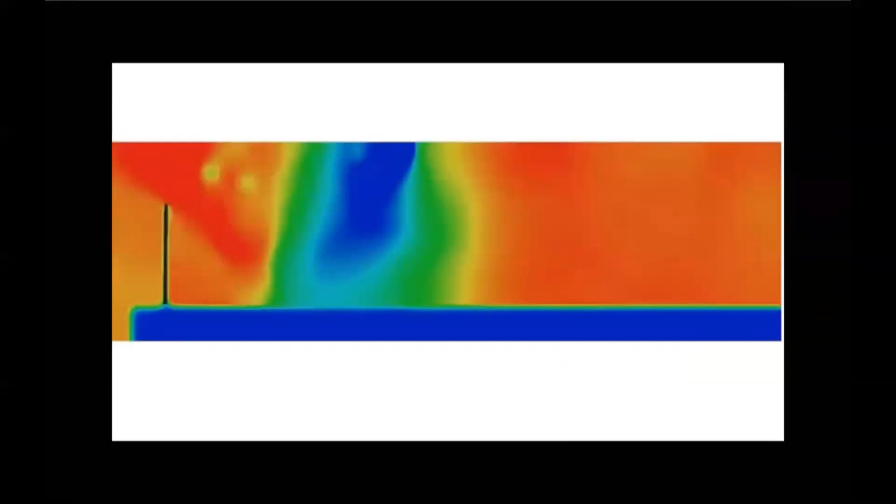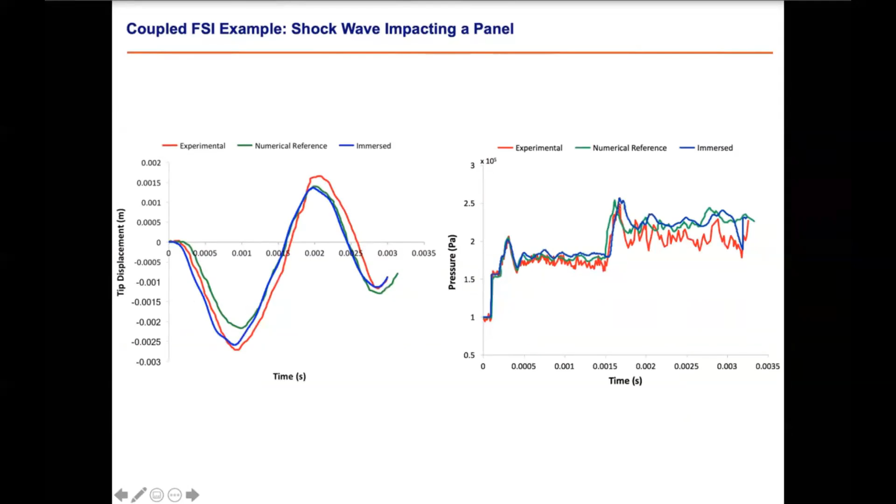This is an example with some experimental data. It's a blast wave affecting a panel. A shock wave comes and sets the panel into vibrating motion. It's a 2D example. This is tip displacement as a function of time, and this is pressure at a given probe in the domain. There's experimental data, and it looks like we're capturing the natural frequency very well of the vibrating plate, and we're capturing the pressure, the first shock, and so forth pretty well too.

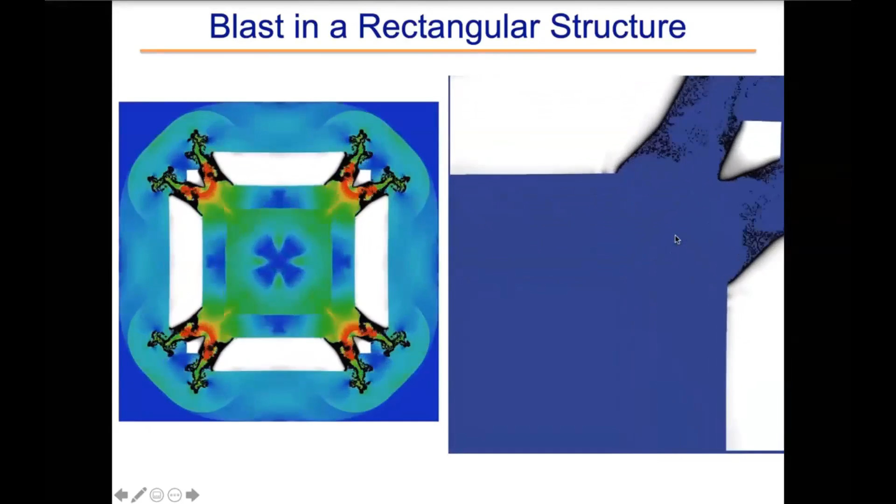This is an example of going to a more advanced modeling for the solid part, where we bring in the so-called phase field models to model fracture. This is a blast set inside a rectangular container. As the blast wave reaches the walls, the stresses induced in the solid are so high that it starts to fracture.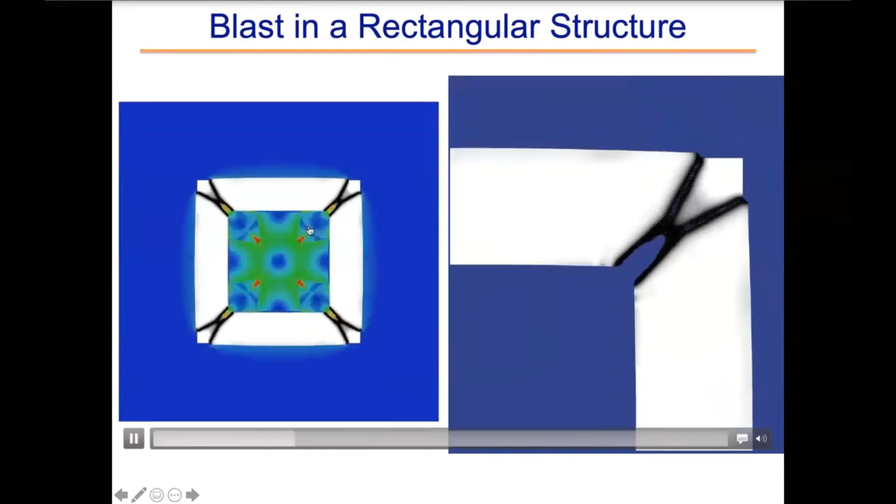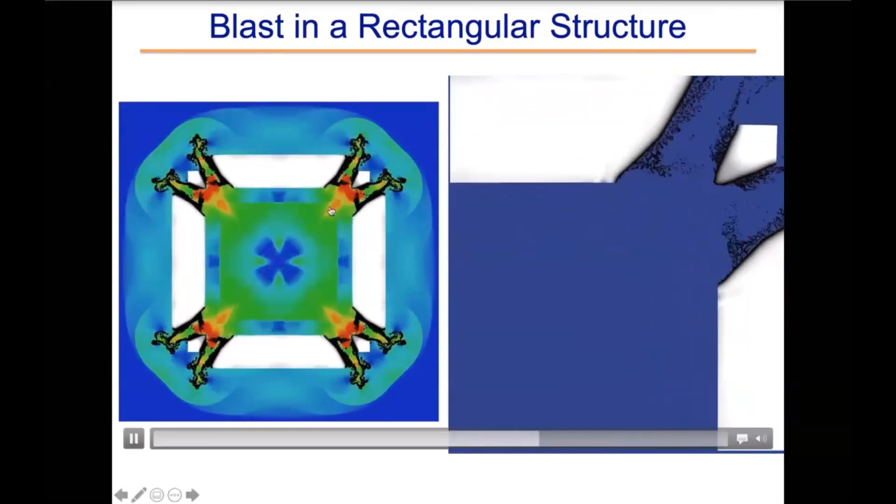The fractures are driven by phase field. They emanate from the regions of stress concentration and travel outward. As you can see, once the solid fragments and starts falling apart, the areas open up naturally, and because the solution lives in the background, they get filled up. I do have the air discretization there in order to continue running the coupled problem.

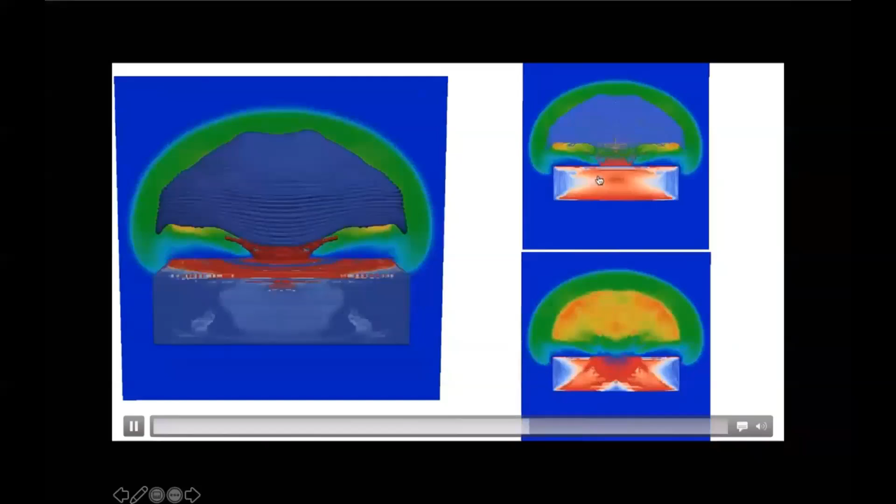Finally, let me conclude with this image here. It's a three-dimensional calculation of a cone blast on top of a concrete block. What we're tracking here is the evolution of the solid. The red is actually, we're using a concrete model here that uses damage. The specimen starts out as pristine, and you can see the damage growth is indicative of the formation of these 45-degree shear cracks.

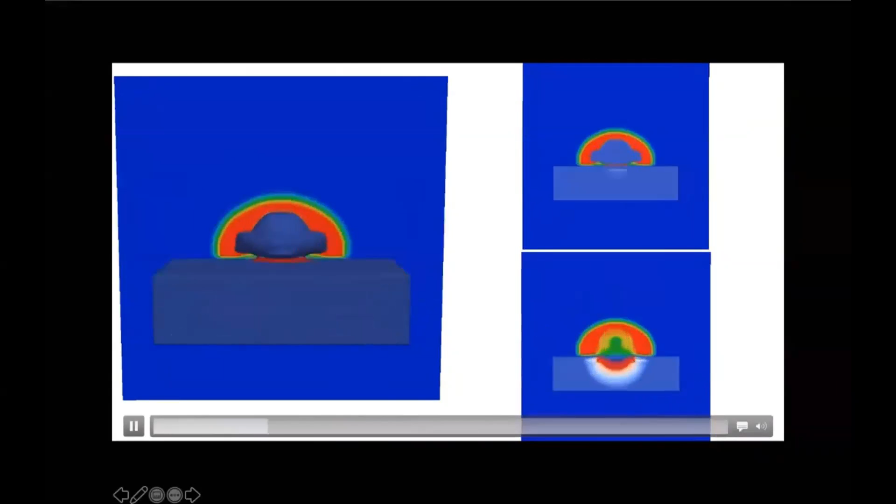And in concrete, you see the formation of a crater, all the particles are flying. With the blue particles here, we're actually tracking the explosive itself. So in this calculation, we're coupling air, concrete, and the explosive, so you can have flexibility like this.